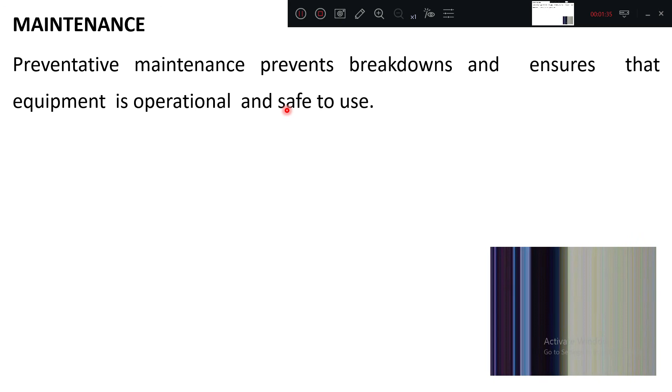Preventive maintenance prevents breakdown. It will stop the breakdowns and ensures that equipment is operational, making sure the equipment is in good condition and safe to use at the site.

It also guarantees the accuracy and reliability of equipment and saves money. If a sudden breakdown comes, a lot of amount needs to be paid, but with continuous maintenance, though there is a cost, major repair work will not come. That is why it guarantees the accuracy and reliability of the equipment.

Accuracy and reliability means that in almost all sites it is going to be used or worked in proper condition, and it saves money.

It can reduce the running cost of equipment and is cheaper than repairs following a breakdown. If breakdown comes, a lot of spare parts are required, so the cost will increase.

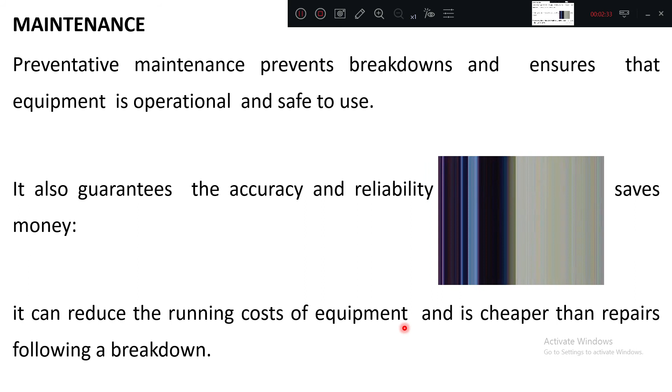But in preventive maintenance, what is happening? You are continuously monitoring, so the cost is a little bit less.

Now what can you see here? Preventive maintenance consists of a number of tasks of varying technical complexity. It includes a lot of technically complex activities, and is carried out by different groups of people.

Same people will not always come. Maybe the equipment has some electronic, some mechanical, some electrical components - all those things are discussed and done by different people.

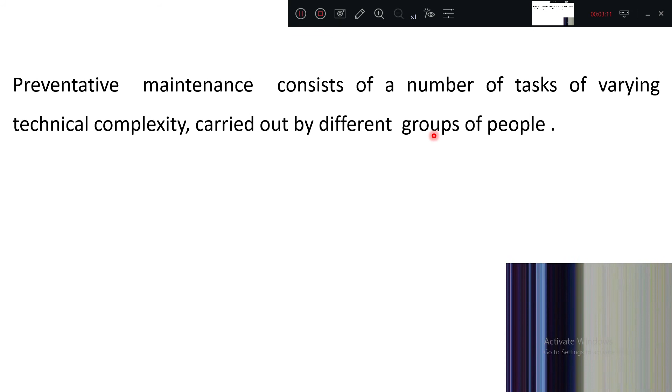An electrician will come and repair the electrical part of the equipment. A mechanical person will come and change the spare parts. Electronic people will come and change the circuits. Like that, different people will come and do the repair work.

Equipment users, including clinic and operating theatre staff, can be trained. The general staff, the operating persons, can be trained to perform many simple care and maintenance duties that need to be done on a regular basis.

Some of the activities can be trained, given training to the regular operating people. Those common activities are dusting, cleaning, lubricating, protecting, and checking the equipment.

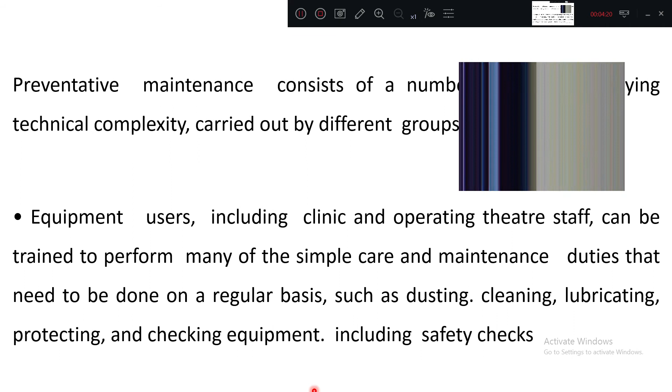These are some of the activities, and this also includes the safety checks. These are the common type of activities.

Other maintenance tasks can be performed by an in-house or shared maintenance team - people who are a little bit more trained, where the repair team has been given some additional training. These persons will come and repair some more important works.

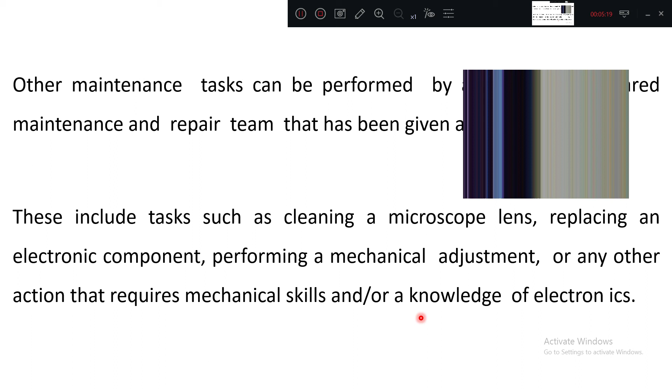What type of tasks do these trained people do? These include tasks such as cleaning a microscope lens - a very important electronic item - replacing an electronic component, performing mechanical adjustments, or any other action that requires mechanical skill or knowledge of electronics. These persons do this kind of work. This is called specialized training.

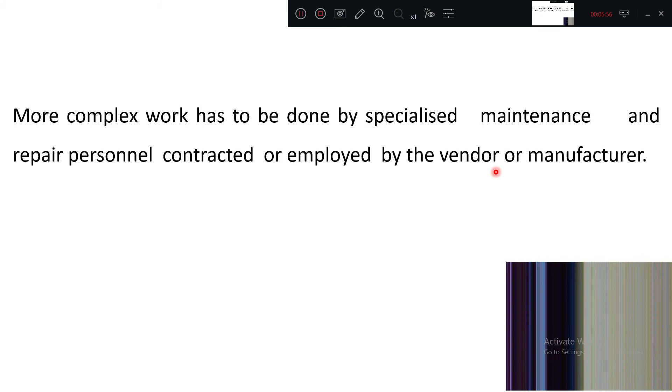More complex work has to be done by specialized maintenance. Some very important things have to come and be done by specialized people. Repair personnel contracted - some additional agencies have to be called for this, employed by the vendor or manufacturer. So company people only will come and change things. That type of special maintenance is also required.

It is important to have a schedule for preventive maintenance of each item of equipment. Scheduling means when to do this, at what time you need to do the maintenance. This consists of a timetable stating when and how frequently the maintenance should be done.

A list of maintenance activities for each item is given - the date, time, schedule, and which component. That list is prepared.

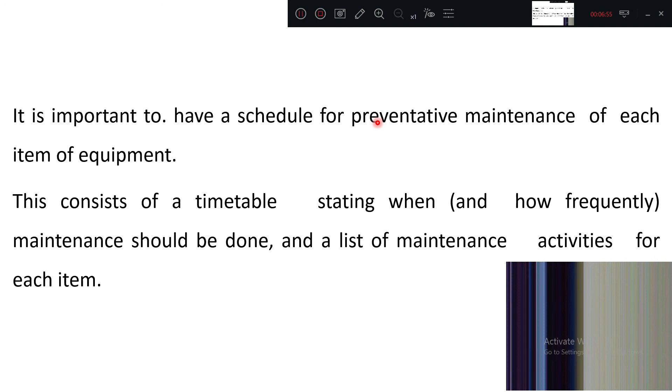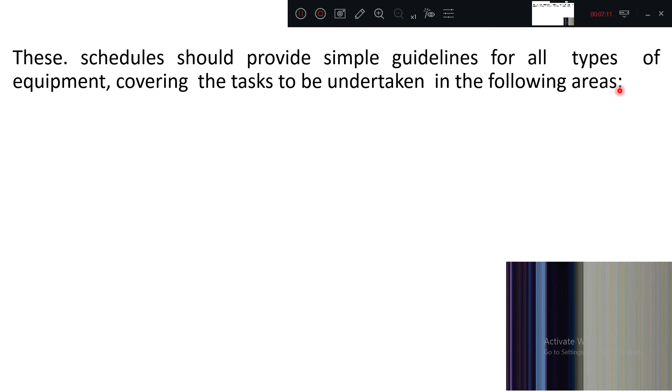Now these schedules should provide simple guidelines for all types of equipment, covering the tasks to be undertaken in the following areas. What are the tasks to be taken? What type of maintenance?

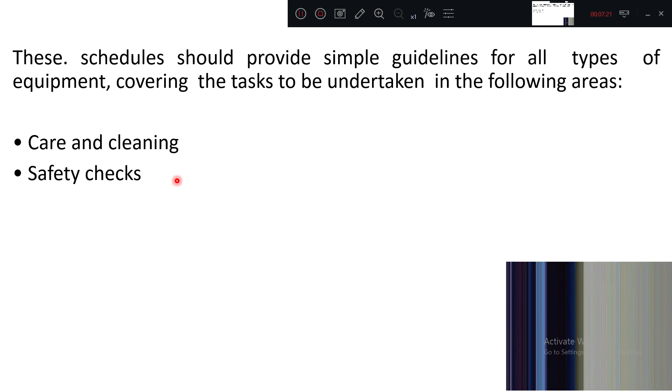Care and cleaning, very important. Safety checks - whether the rear glass is correctly working, indicators are working or not. All the checks should be mentioned in the schedules.

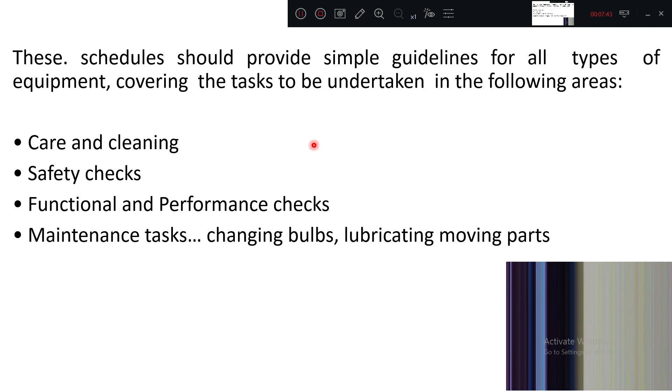Maintenance tasks such as changing the bulbs, lubricating the moving parts - all those things should be considered. How can it be done? By referring to the manufacturer manual or service manual. Generally the company, whenever purchasing is going on, gives some manuals, so by referring to them we can go for the manual things.

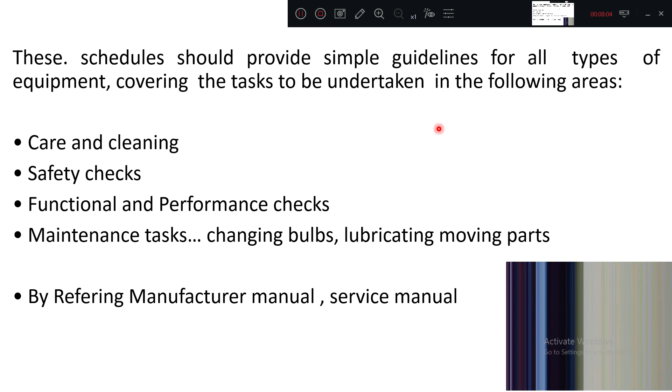Schedules need to be developed separately for users and maintainers. The regular people who use the equipment day-to-day should have a different schedule, and for maintenance people the schedule should be different.

For example, users can perform checks and basic maintenance tasks on a daily basis, like cleaning the dust and adjusting the mirror. For them, the task is very common.

Whereas a maintenance team can set aside a specific day of the week or month to carry out regular maintenance tasks. The special trained people coming from the company have different schedules - for example, every first week or first day of the month they come and inspect all the things mentioned in the schedule.

Now more sophisticated maintenance tasks, which are still very important, need to be carried out by service agents. If you have taken a Caterpillar excavator from the Caterpillar company, specialized maintenance tasks have to be done by them only - they know each and every part of the Caterpillar machine. So those people will come and check, and that operation checking should be scheduled for a specific day or week in the year.

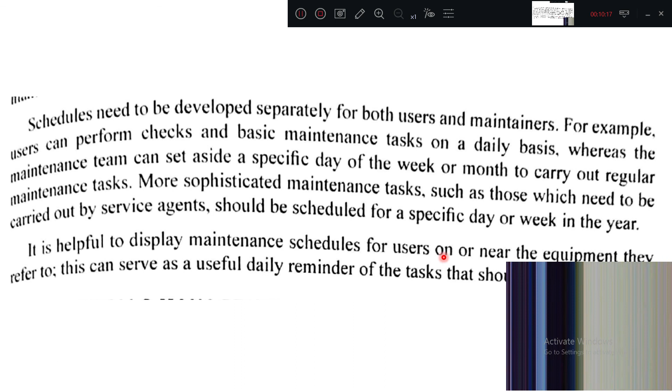On this day maintenance work should be done - so it is helpful to display the maintenance schedule. These are nothing but charts or timetables for the users to refer to near the equipment, meaning whenever they are parking it they should mention the charts there.

This can serve as a useful daily reminder. Daily you are seeing the chart - next day we are going to do this repair, this checking - like that they continuously follow it. So it gives a reminder of the task that should be performed, what should be done and how it should be done, as it is already mentioned there.